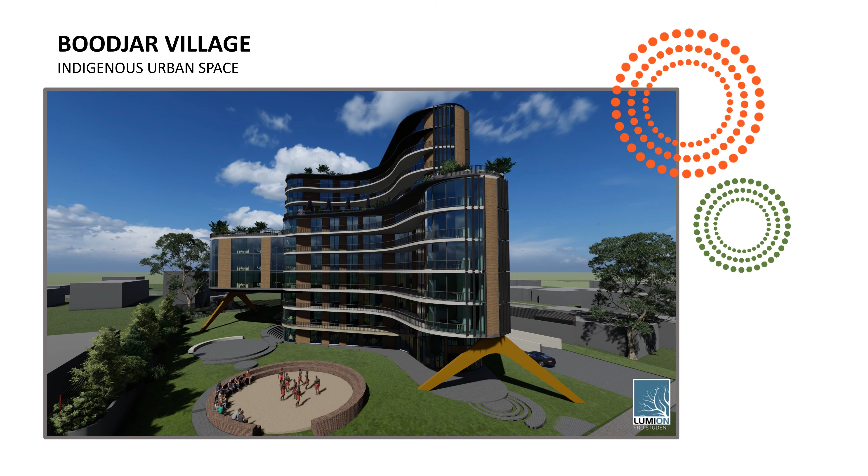Hello, my name is Corey Kenny. I'm a Masters of Architecture student at Curtin University. I am also an Indigenous man from Darkinjung country on the New South Wales Central Coast.

My long-term ambition is to use my qualifications to promote my culture, to raise awareness for my culture, and to help improve the lives of my people. Today's presentation is a reflection of this ambition. I will present to you a unique architectural proposal called Boodjar Village, which is an attempt to use the built environment to remind colonial Australia that it has an Indigenous past.

In my opinion, it is a necessity that our urban environments begin to offer Indigenous spaces. After 200 years of displacement and dispossession, 70% of Indigenous people now live in urban environments. But the urban fabric does not reflect this statistic. It is time to break down the notion that Indigenous people do not belong or do not exist in our cities.

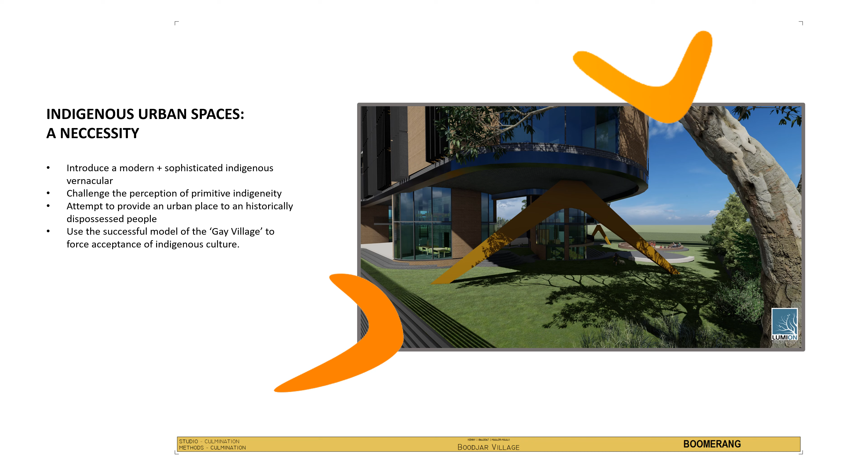Boodjar Village is necessary for the following reasons. It will introduce a modern and sophisticated Indigenous vernacular. It will challenge the perception of primitive indigeneity. It will attempt to provide an urban place to an historically dispossessed people. It will use the successful model of the gay village to force acceptance of Indigenous culture.

There is a great deal of writing in the field of identity politics which indicates that the gay urban village has transformed the reputation of the LGBTQI community from what was considered a dirty underclass in the 1980s to a fashionable, desirable and consumerable culture today. By introducing an Indigenous vernacular, Indigenous consumer spaces and places for Indigenous people to find each other, it is not unreasonable to conclude that this model could have similar outcomes.

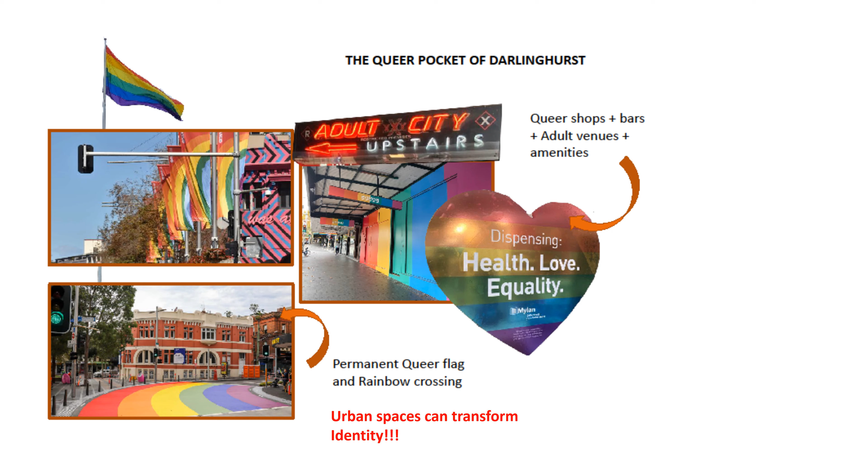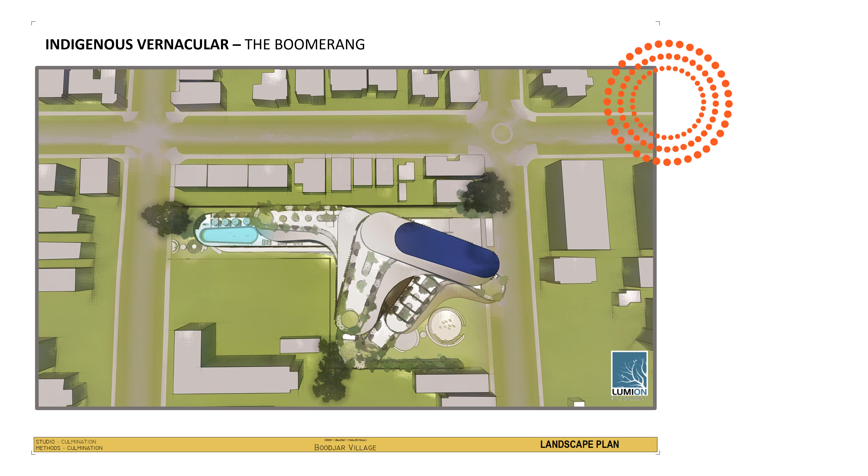The landscape plan of Boodjar Village immediately introduces a strong Indigenous vernacular using the famous boomerang form. The boomerang form is an organic juxtaposition to its surroundings and a clear breakaway from colonial traditions.

The layered and stepped assembly of the boomerang-shaped levels allows the Indigenous concept of country to be imagined vertically. For Indigenous people, the idea of country is a connection to and a care for the land.

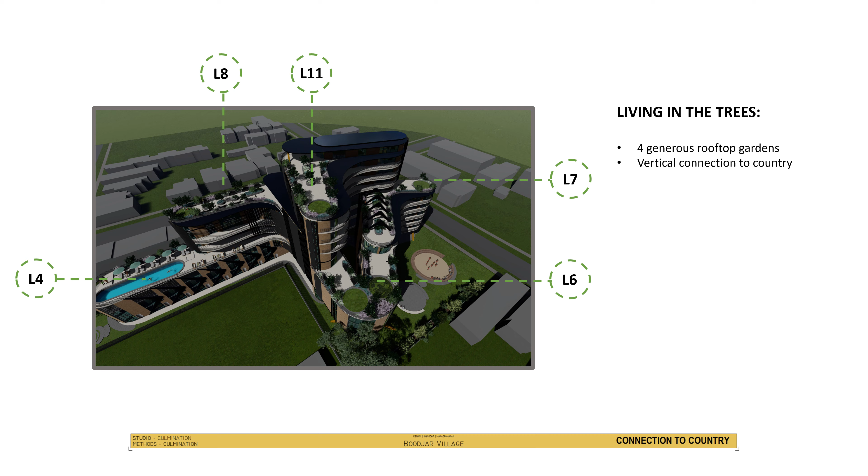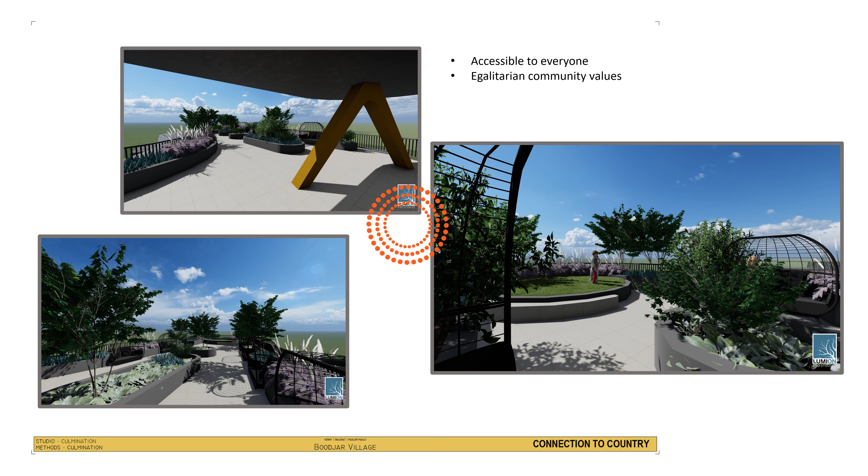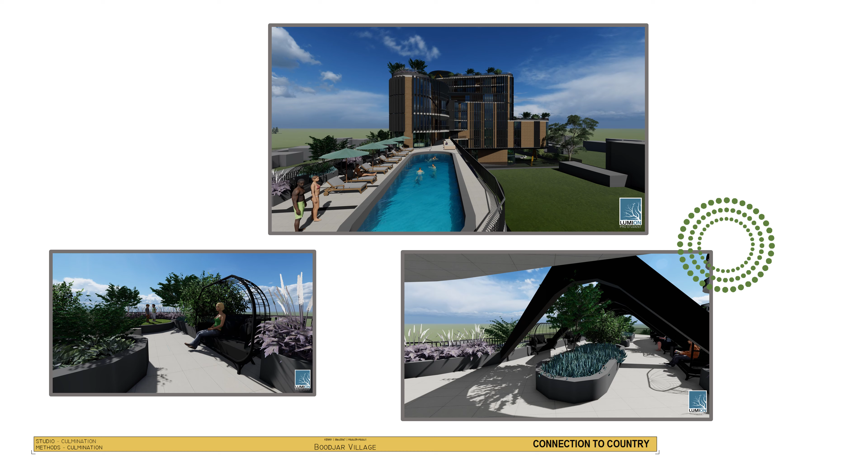This connection is evident in the 4 generous rooftop gardens, which are accessible to all residents to enjoy. This freedom of spatial movement and accessibility is important as it encourages a sense of equality and egalitarianism within the village. It also gives residents who are on lower levels the opportunity to enjoy the city views to the south, river views to the east, and parkland views to the west.

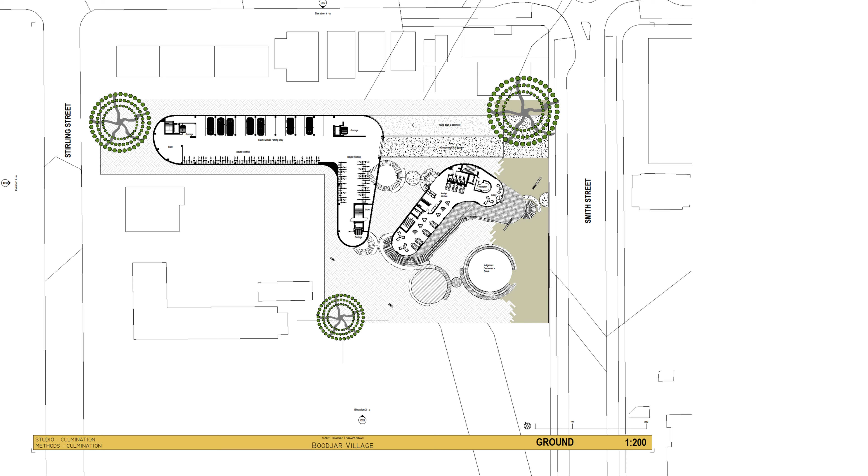We will now explore a number of plan views to further understand the benefits of the Indigenous village. This ground floor plan comprises a lobby which leads to an Indigenous restaurant which I have named Auntie's Kitchen. It is imagined that such a place will be an informal place for Indigenous people to connect and to be found. The idea of finding each other is particularly important as Indigenous people have systematically been displaced not only from their lands, but also from their families and communities. Importantly, the restaurant is open to the external spaces and faces directly towards the ceremonial performance space.

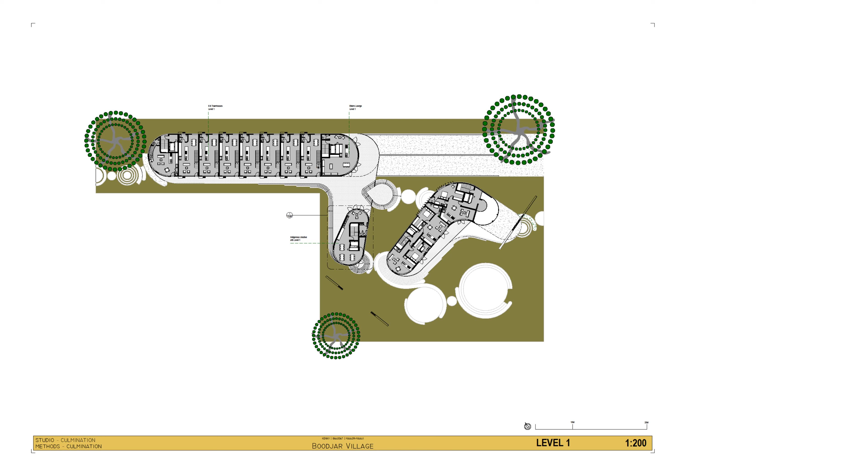The Level 1 plan shows how Boodjar Village has retained vast amounts of open green space and gardens for its residents, as well as the retention of 3 large gum trees already existing on the site.

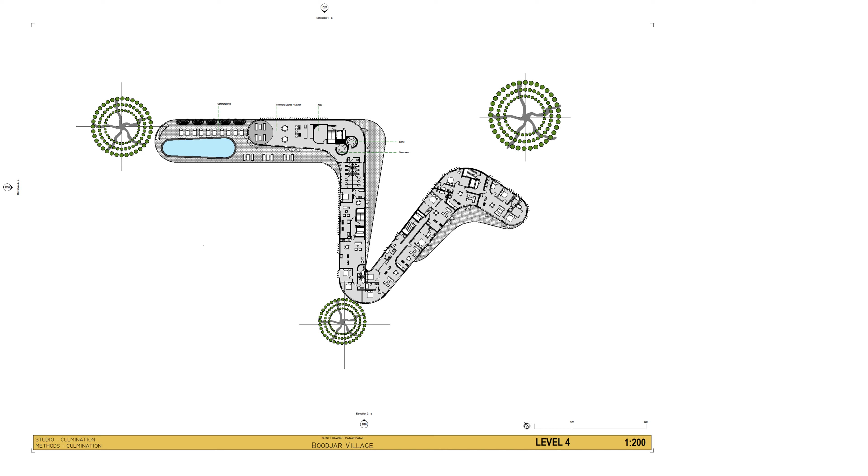Level 6, Level 7 and Level 8 are fully accessible rooftop gardens with circular lawned areas.

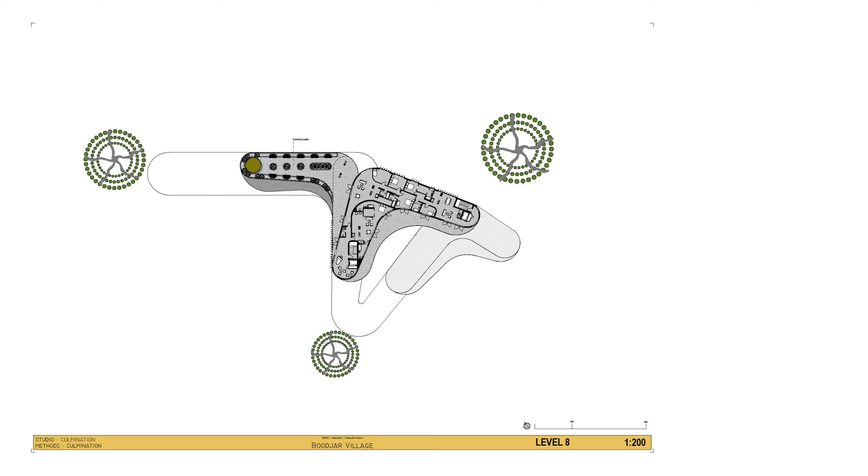Boodjar Village is unique as it will offer a sand-filled ceremonial space. While it is true that Indigenous culture has modernised and urbanised, cultural traditions are still practiced today. Indigenous dance is an expression of the Dreamtime stories, which always speak about man and his relationship to the Boodjar, otherwise known as the earth.

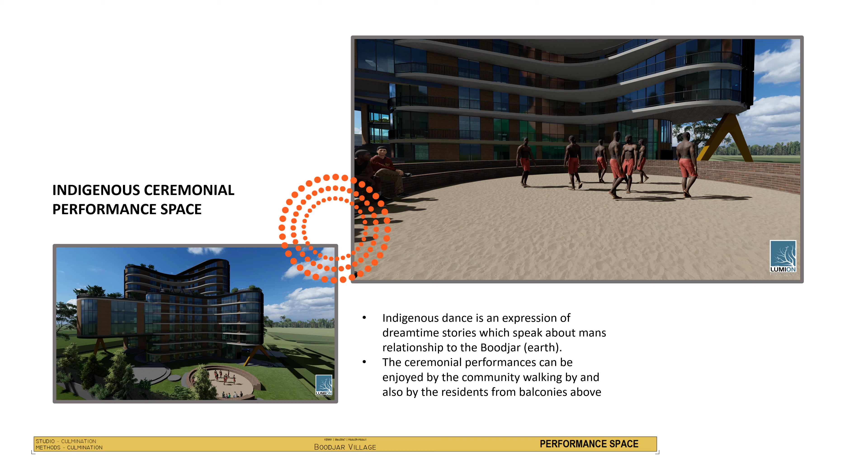Taking pride of place at the Smith Street entrance and lawn, Indigenous culture can be enjoyed by the community walking by and by residents from balconies above. Such a space is crucial for raising awareness of and fostering acceptance of Indigenous culture in our urban communities.

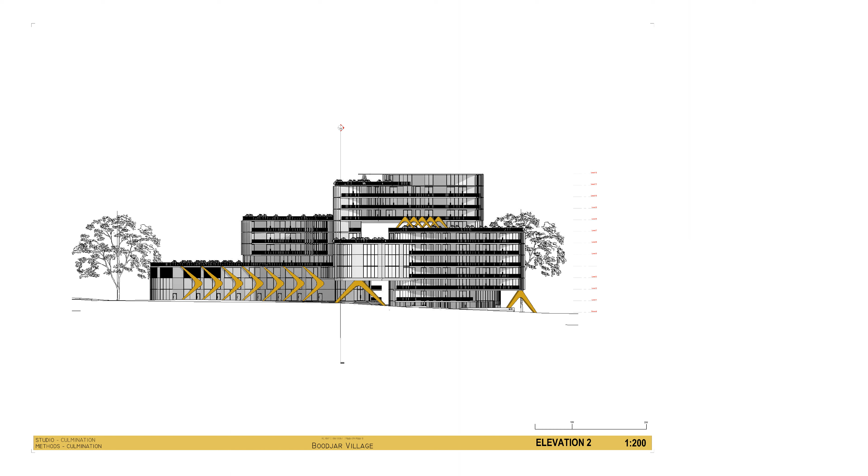The boomerang vernacular is also evident in elevation. The form has been repeated in large shade fins which dress and delineate the townhouses on the Stirling Street side of the building. The boomerang is also a feature of the columns which hold up the cantilevered floor and roof slabs.

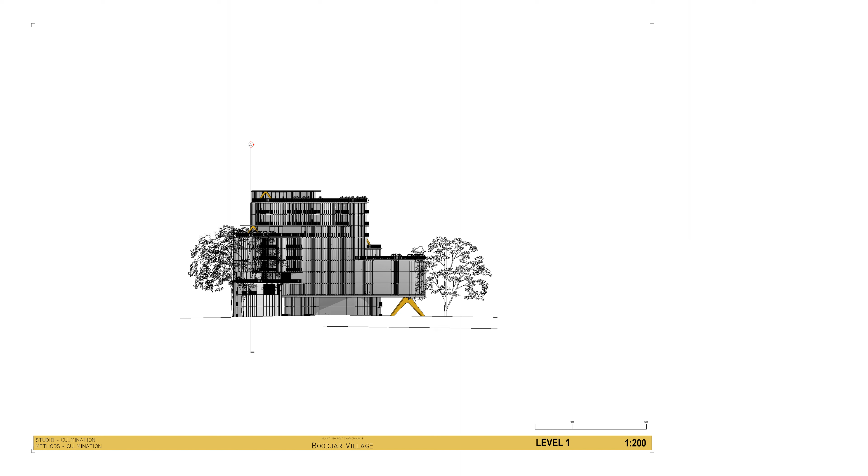Of note is the Smith Street entrance, with the boomerang also doubling as an archway to welcome visitors into the village. The entryway is crucial. It acts as a physical Indigenous threshold which invites you to leave your preconceived ideas of the world behind and asks you to open your mind to a different and more inclusive world.

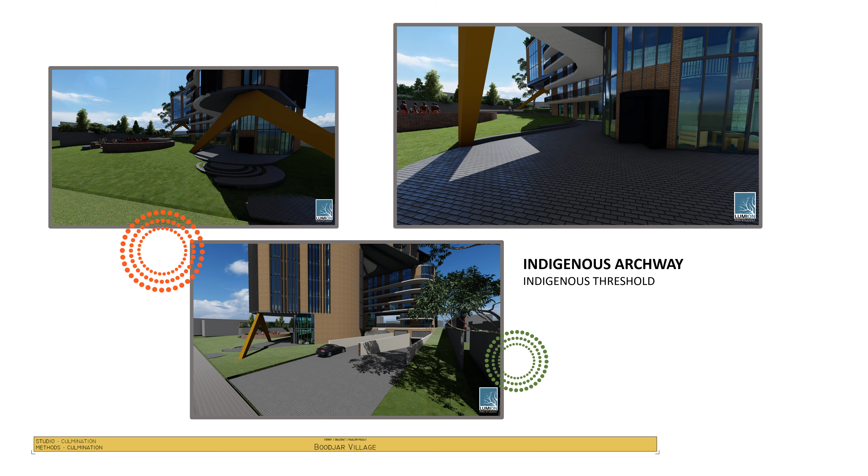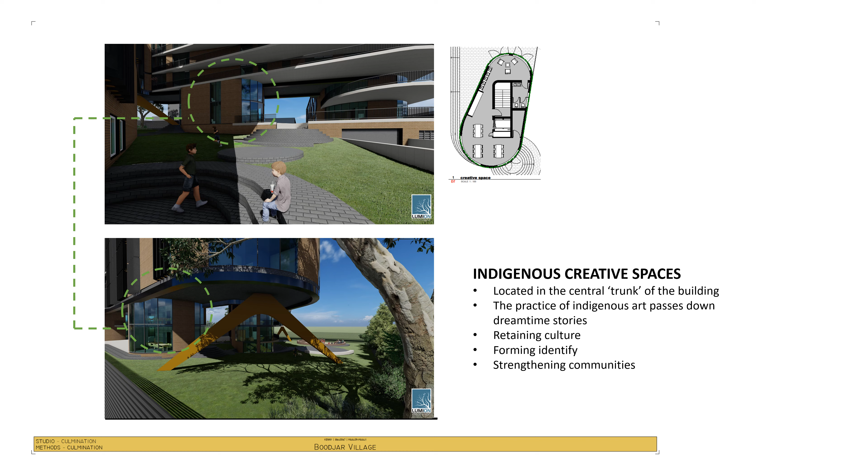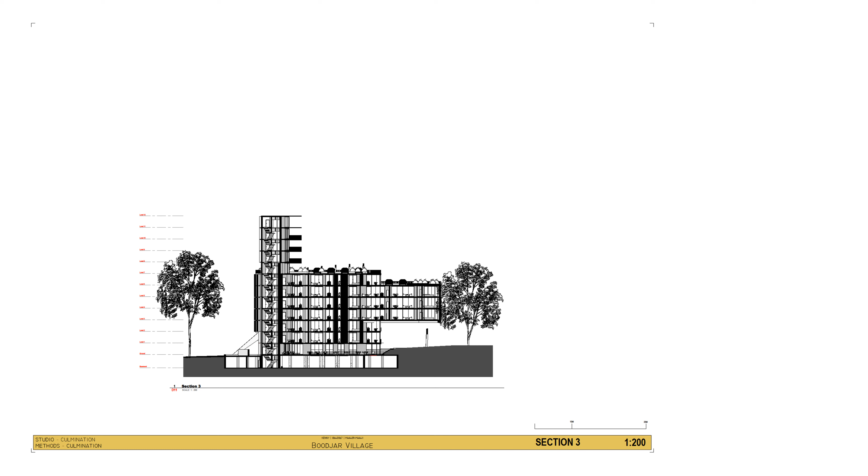As a relatively skinny building form, most apartments are double-fronted, which enable an abundance of light. This double-fronted arrangement also takes advantage of the surrounding views, whilst the boomerang angles are designed to reduce direct overlooking into its neighbours.

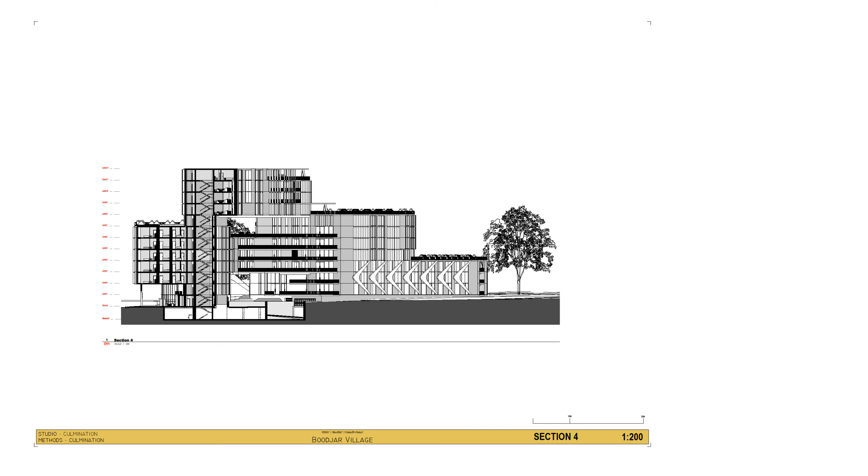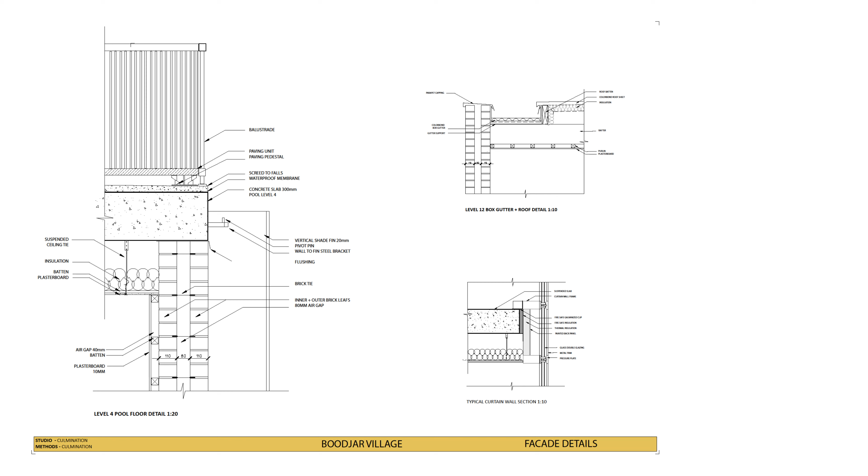In close-up detail, the building envelope is of a standard double brick construction. As a natural and somewhat abundant material, the red brick colouring and rocky texture is a carefully considered choice for our Indigenous vernacular.

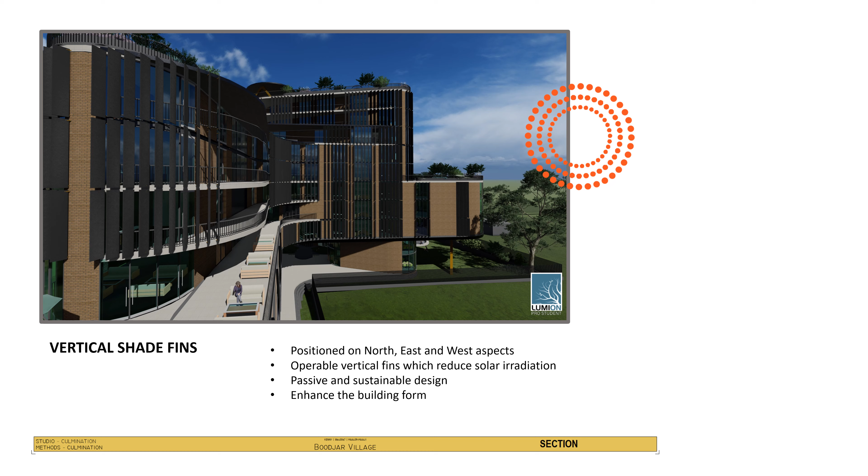As one of the hottest cities in the world, it was necessary to design an operable shade mechanism to protect the building from solar irradiation. Vertical fins made from charred and blackened timber are positioned on the north, east, and western curtain walls. The fins also act to vertically unify the floor levels and reduce the impact that the balconies have on disrupting the boomerang form.

I will conclude the presentation with the following rendered images, which express the organic form of the exterior, the organic nature of the materiality, and the Indigenous heart of the project bound together by the notion of the Indigenous Boodjar.

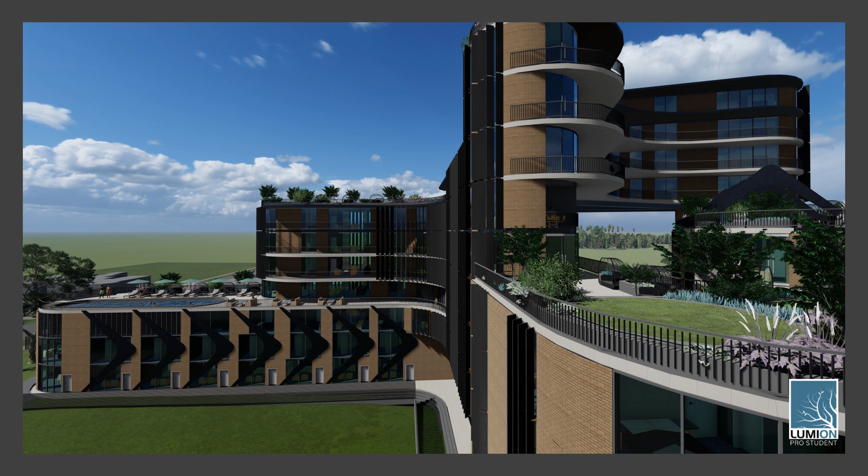I hope I have been successful in challenging your perceptions of what it means to be a modern Indigenous Australian. I believe it is important for modern Indigenous people to have urban spaces to share, urban spaces to find each other, and urban places to practice traditions. Such spaces should have a sophisticated Indigenous urban vernacular, which break away from colonial symbolism and in which Indigenous people can identify with. It is also imagined that such spaces will teach non-Indigenous people that colonial Australia has an Indigenous history. Thank you for your time.